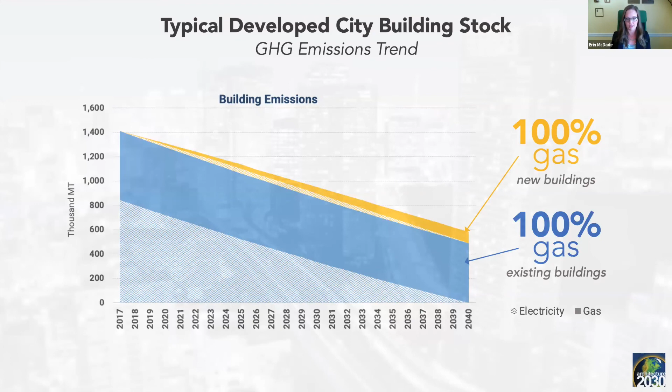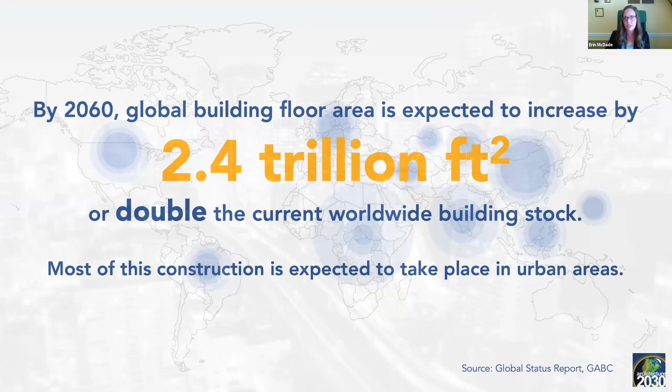So starting with new construction, those charts indicated that for most cities, new construction is not the majority of emissions. But within the next few decades, the global building floor area is expected to increase by 2.4 trillion square feet. And to get an idea of what that is, that's really double the current building stock, or essentially building a new New York City, all 5 boroughs, once a month for the next 3 decades. And most of this construction is expected to take place in urban areas. So clearly addressing new construction emissions is going to be critical.

And in order to make sure that we have fully addressed these new emissions and decarbonized our new construction building stock, it will require 3 specific things everywhere in every city across the globe. So the first thing all of our new construction is going to need is energy efficiency. And this is achievable by making sure that all the buildings we design and build meet the latest model energy codes, such as IECC 2021. And all of these buildings also have to be fully electric. We can't be combusting on-site fossil fuels if we're going to decarbonize. So we have to make sure that our heating and cooking systems, et cetera, are fossil fuel free.

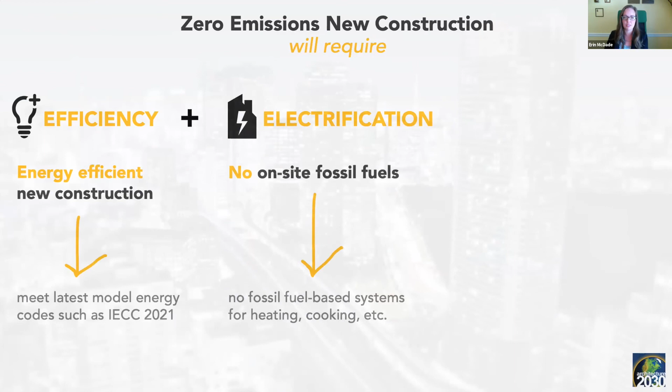And finally, all of the energy demand for these energy efficient, all electric buildings must be generated or procured from carbon-free renewable energy sources. And one way to support that is a zero code renewable energy standard, which I'll talk about in detail in a minute.

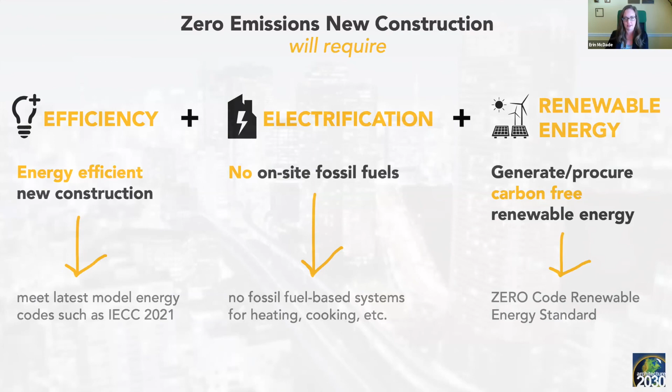So in order to support implementing zero carbon new construction across the globe, Architecture 2030 recently launched the Zero Code, which is an internationally applicable building code standard for zero carbon construction. And again, it addresses these emissions from new buildings, which we know will be significant, by requiring that all electric buildings use carbon-free renewable energy, and that all of this carbon-free renewable energy is in addition to the renewable energy that utilities are required to be adding to their grids as we speak. So it's ensuring not only that these buildings come in emissions free, but that we're helping meet increased electricity demands from these electric buildings by adding renewable energy to our grids across the world.

And pretty quickly, it's easy to see how to meet the Zero Code. So as we've covered, you design an all-electric, energy-efficient building that uses no on-site fossil fuels and meets the latest model energy codes, and then the renewable energy requirements for that building need to be determined. And there are a couple of pathways provided.

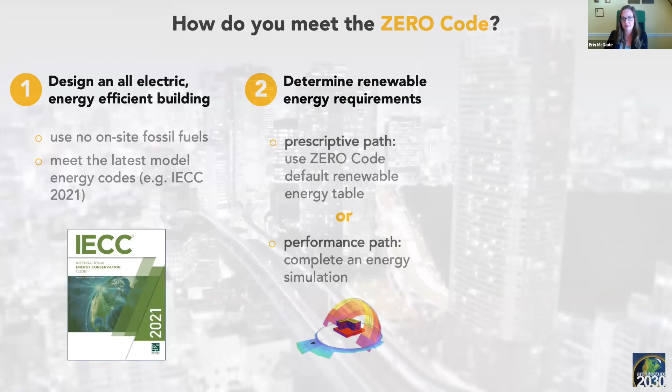A prescriptive pathway uses the Zero Code default renewable energy table, which is provided within the code, or a performance pathway allows for the completion of an energy simulation in order to determine the renewable energy requirements. And then these renewable energy requirements are met either by generating on-site renewable energy, or again, procuring off-site renewable energy from sources that ensure the addition of new renewable energy to the grid.

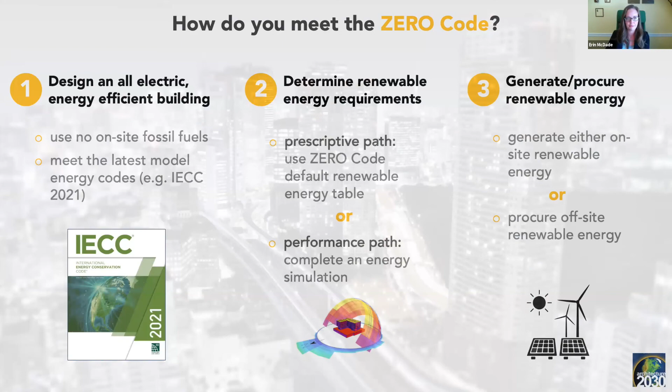So a lot of those standards like IECC 2021 and others are used in some places, but potentially not in other places. And there are renewable energy standards developed for certain regions, but not others. But again, every single building that we build, new construction, will need to meet these 3 criteria. And there is a lot of momentum across the world to support meeting that.

So for energy efficiency, the building sector has been working on this for decades and decades. And we have standards across the world that include very high energy efficiency standards to help guide meeting the energy efficiency requirements of the Zero Code. And electrification is potentially where we're seeing the most exciting momentum in the United States and across the world today.

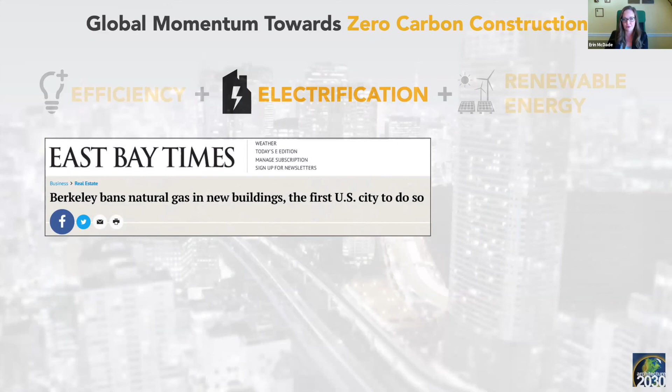So as most people know, Berkeley, California last year passed a natural gas ban in new buildings, which was the first city in the US to do so. And within the following months, 33 California jurisdictions have passed similar electrification or decarbonization ordinances. And this is only about half of all the jurisdictions in California that are in the process of passing similar ordinances. And even the largest investor-owned utility in California, PG&E, recently came out and said that they fully support all-electric buildings and are working on ensuring that the whole state meets those standards.

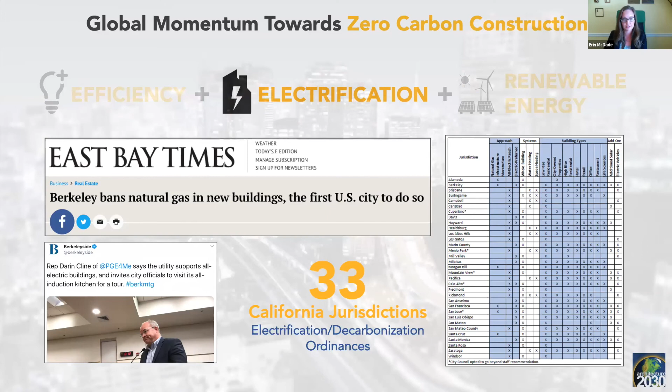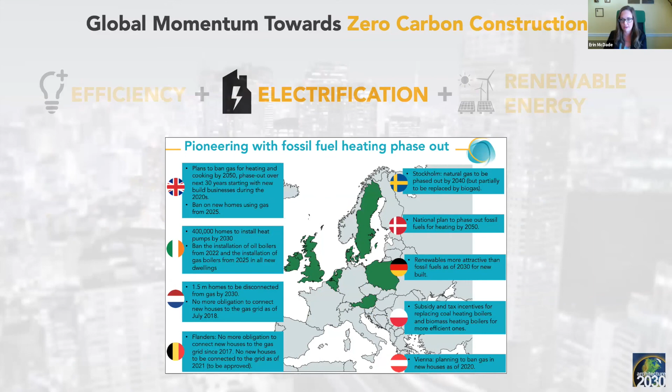And unsurprisingly, Europe, of course, has already been working on electrification and continues to explore various ways of electrifying the building stock and phasing out fossil fuel heating across the continent. And then finally, as I mentioned, there are renewable energy standards to meet that third piece of the zero carbon construction pie across the world. The European Union has a directive for both on and off-site renewable energy, as does China.

And the exciting news is that just recently, within the last couple of months, the Zero Code Renewable Energy Appendix has been passed. What happened is that the AIA, the American Institute of Architects, submitted the Zero Code into the IECC, and the IECC passed the Zero Code as submitted to be included in the update, the IECC 2021, that will be available this fall. And this means that starting next month, jurisdictions across the world can adopt renewable energy standards to help meet zero carbon construction.

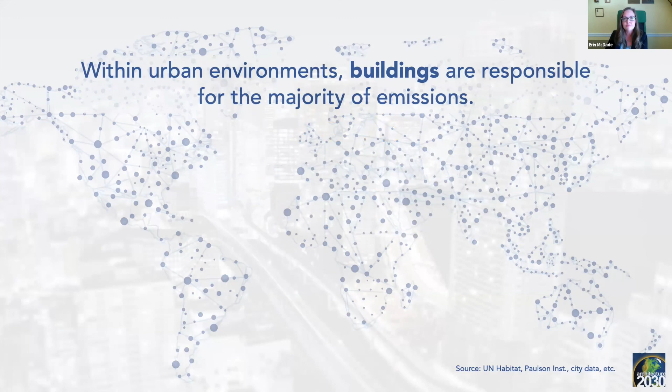So decarbonizing new buildings is critical, but those charts at the beginning of the presentation showed that for almost every city, the majority of the emissions are actually coming from the existing building stock. So stepping back, big picture, urban environments are responsible for about 75% of all energy consumption and human-produced greenhouse gas emissions, so very important. And within urban environments, the buildings are responsible for the majority of all those emissions.

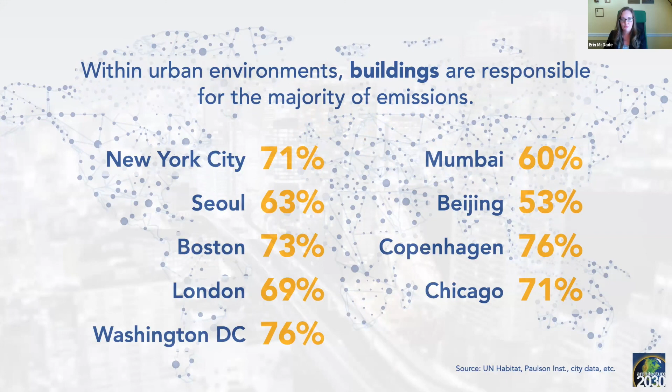And so we can see here a list of major cities across the world, and the numbers in yellow show how much of the city's total emissions come from the building stock. So where do the emissions come from within the building stock though? We're using Seattle as an example, but this represents a trend that we've seen all across the United States and across the world, which is pretty fascinating.

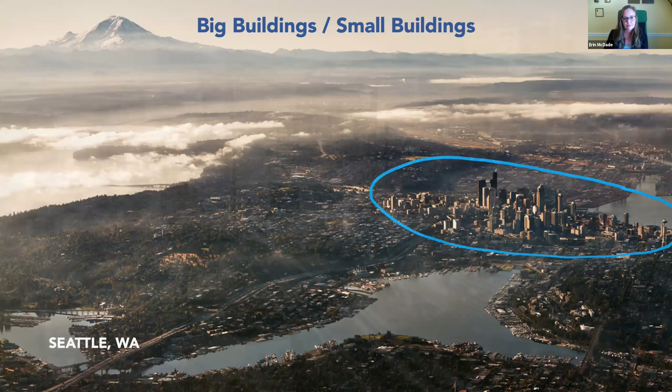In Seattle, 2.8% of the total buildings in the city, which is a very small percentage of total buildings, are responsible for 45% of total building sector emissions, which means that the remaining almost 200,000 buildings in the city are responsible for the other 55% of sector emissions. And decarbonization policies for those two different subsets of the building sector require very different implementation strategies.

So what this means is that a successful decarbonization policy for existing buildings is not one size fits all, but Architecture 2030 has developed a framework for figuring out how to create the correct decarbonization policies for the various subsectors of each city's building stock. And it starts with asking a couple of important questions.

Who will be affected by the policy? Some examples, we just looked at big and small. It might also mean commercial or residential. It might mean owner occupied or renter occupied. There are plenty of other breakdowns. And then what will the policy require? And the typical pathways for looking at what the policy will require are, again, either prescriptive requirements, which are typically cheaper and easier to implement, but they don't give owners as much choice in what kind of upgrades will be required to decarbonize their building.

Or performance requirements, which are essentially the opposite. They give building owners a bunch more choice, but they require more time and are often more expensive because they require pre and post project audits. So each one is more appropriate for various subsectors of a building stock.

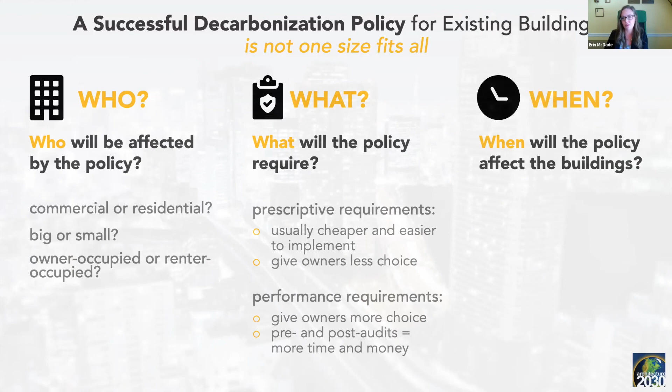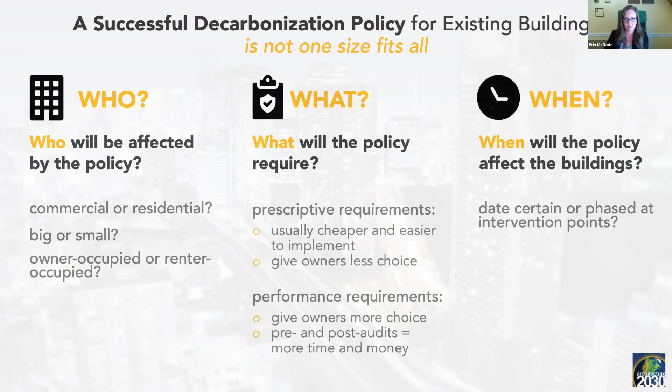And finally, when will the policy affect the buildings? And the two considerations for this are usually, will the policy be a date certain policy, meaning it's implemented on a certain date, and on that date, all the buildings that fall under that policy are required to meet it? Or will it be a phased policy that's aligned with intervention points? And I will dive into what intervention points are here in a second, because these are a pretty critical way of creating strong and implementable decarbonization policies.

So when we're talking about intervention points, what we're really talking about are planned capital improvement cycles, which typically exist for large buildings, are not super common for small and medium buildings, or point of sale, point of lease, point of renovation, or point of equipment replacement. Essentially, anytime the building is being touched or ownership or occupancy is changing hands. And of course, life safety and resiliency upgrades like seismic retrofits.

And the benefit of aligning policy requirements with intervention points is that it significantly reduces the upgrade costs, which is in particular a critical barrier for smaller and residential buildings. It reduces the disruption to occupants. And there are increased financing options associated with aligning with intervention points. Again, a really critical consideration when we're talking about residential buildings or smaller buildings or renter occupied buildings, where the upfront capital costs may be one of the biggest barriers.

So there's a lot more detail about why all of these intervention points are so important and what the benefits of each of them are. And that can be found on achieving-zero.org. And in fact, a bunch more information about all of this. Really, this is a multi-year project that Architecture 2030 has been working on. Can be found at achieving-zero.org, including guidance on how to go about answering those critical questions that I outlined in order to start creating successful frameworks for decarbonizing the building stock in any city across the world.

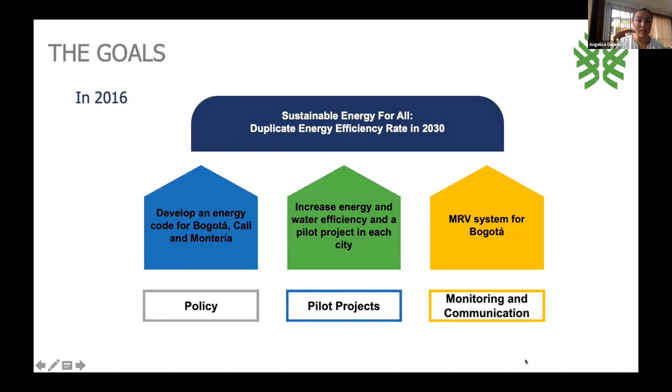And with all this work, we have been working on this project for the past 4 years, and now we're moving from these energy codes that we developed for energy efficiency to a net zero commitment in terms of the country. So now we're working in a new project that is like another phase of the past project, and here we have the goal of achieving zero carbon new buildings by 2030 and existing buildings by 2050. And in this new project, what we are doing now is to work at the national level and also at the local level, and also working in a national MRV platform.

In terms of that national strategy, what we are working on now is with the different ministries of the country, and something that is very exciting about this project is that we have gotten the commitment from the Ministry of Environment, also from the Ministry of Housing, the Ministry of Energy, the Ministry of Industry, and also from the Department of National Planning.

And all this group is working together on developing the roadmaps and commitments to decarbonization of the building sector in the country. Then in terms of the local cities, we are starting to work at this point with Bogota, and we are still deciding the other city that we're also going to work with, to develop subnational strategies for zero carbon buildings. And something very exciting also is to work on a national MRV platform, because what we learned from this past project is the importance of monitoring and of communicating how the different policies really have an impact or not in our country.

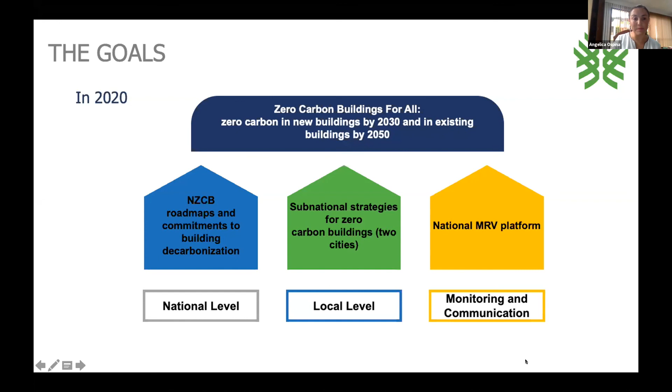So what I'm going to do now is tell you a little bit about the results that we got from that first phase. This second part, we are just starting at this point, but I think it's great that we already have the commitment of the country and that we have already started working on these roadmaps. So in terms of the energy code development, that was one of the huge parts of that project. We really worked with the different stakeholders, and as I told you, we started working at the local level in Bogota, and then we replicated the same work in the other cities of the country.

So we brought together national and local governments, also energy utility companies. Something very important was also to include the developers, designers, and different professionals, also suppliers, manufacturers, and also the financial services, because all these are very important in order to develop this code and to make possible the implementation of the codes. And what we came up with at the end of this process was an implementation protocol for that national resolution. For that, 3 different resolutions were published last year, one in Bogota, one in Cali, and one in Monteria. So it's very important that this code also became part of that local policy in terms of energy efficiency.

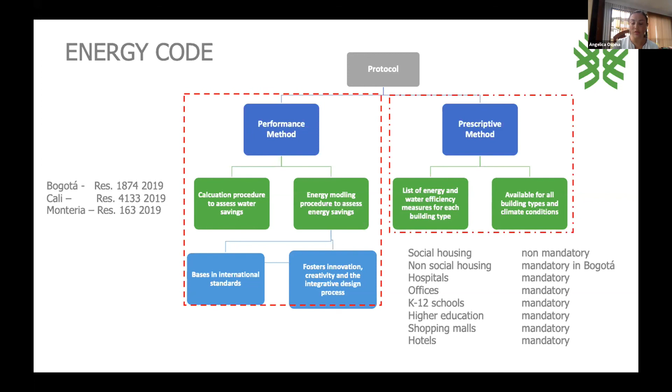And how did we develop these energy codes for the cities? We used as the main base the ASHRAE 90.1 2016, and we built common practice primary packages for all these different typologies, doing some interviews. In Bogota we conducted more than 60 interviews in order to understand that common practice, because that was very, very important. And also a whole set of different energy simulation iterations in order to get to very cost efficient primary packages with energy and water efficiency measures. And I think that was very important because for the government in Bogota, having very cost efficient measures was very, very important, because we couldn't increase the cost of construction in the city.

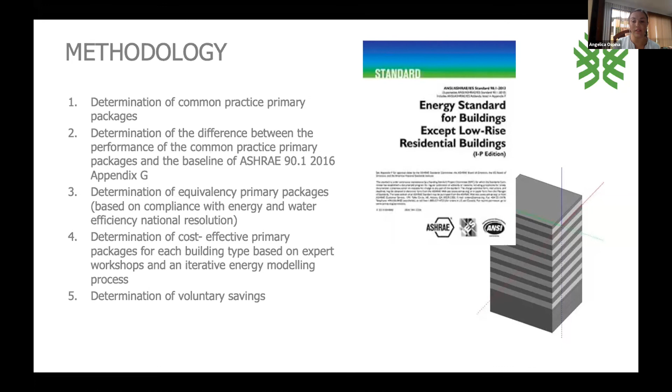And what we also had at the end was a set of packages of additional savings that we call voluntary savings. And those are very important because at this point, for instance, in Bogota, different incentives are being created for those additional savings that can be achieved using these different methods. So here I have just some results for some of the typologies of buildings that we have. Here you can see, for instance, for offices, the savings being required are 21% in energy and 44% in terms of water. And here you can see the additional investment that the developers will have to make in order to comply with this code, which we think are very acceptable additional investment percentages.

So here is just an example of what we got for hospitals, social housing, middle income housing, where you see that there is huge room for more and more savings. And what we think is that these codes will have to be updated every 5 years or something like that.

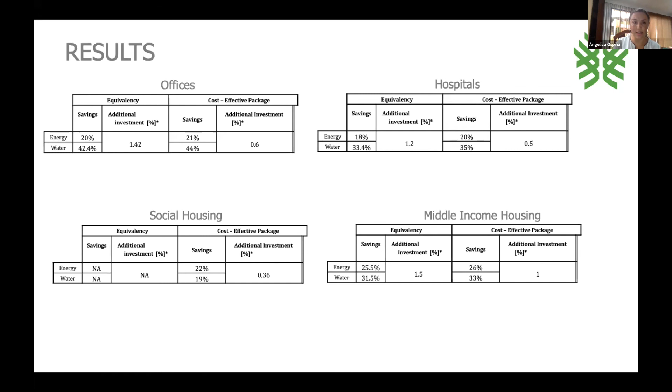And the other very interesting thing that we have been working on, and that we know we have to continue working on at the national level, is the development of an information system based on information that we can get from different sources in order to create an MRV system for the city. This is especially for Bogota. What we want is that if we develop these sustainable construction policies and this energy code, we can assess if there is really an effect of those policies, and also give feedback to all this policy process.

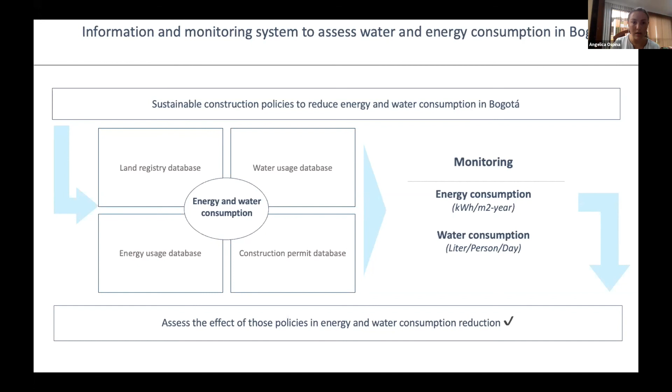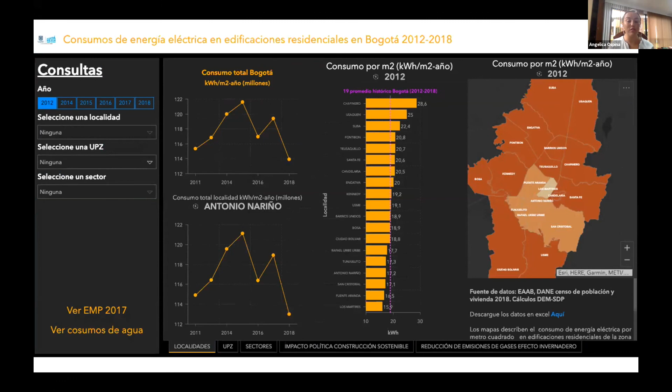And here you can see the information system that we got, and the main results. You can have information in terms of the different counties of the city, the whole city, or the zonal planning units of the city. We have information in terms of water and also energy. So we think we can get very important information from the system, and the city can use it to develop other policies.

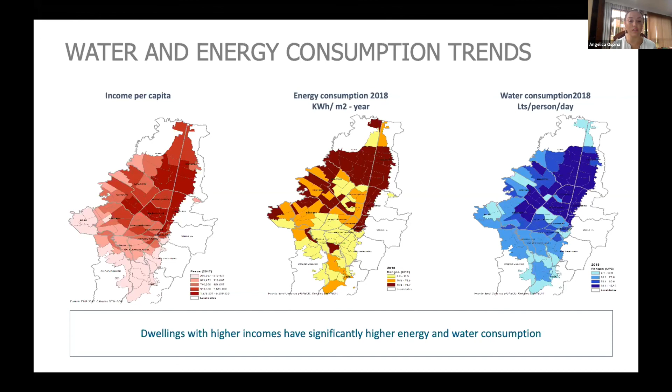And with all this information, we have been able to develop different types of analysis based on income per capita, and how this affects or not energy consumption and water consumption. We can see in these graphs that we have significantly higher energy and water consumption in residential units with higher incomes. Something very important was to see if they were implementing different energy efficiency measures, and if this was helping or not in energy consumption.

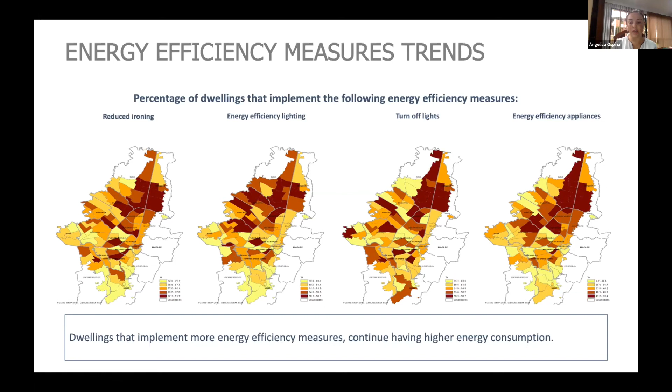So at the end we came up with a lot of information to be able to continue in the process of net zero. I think we now have the information and technical studies to be able to move to that new commitment that the country has made.